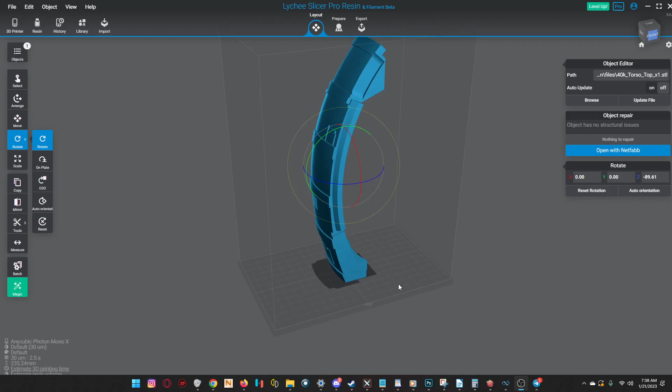Today we're going to be looking at supporting large objects, because this is something that comes up a lot and it's not quite the same as supporting miniatures. It's quite a bit more mechanical and has a bit of a different technique.

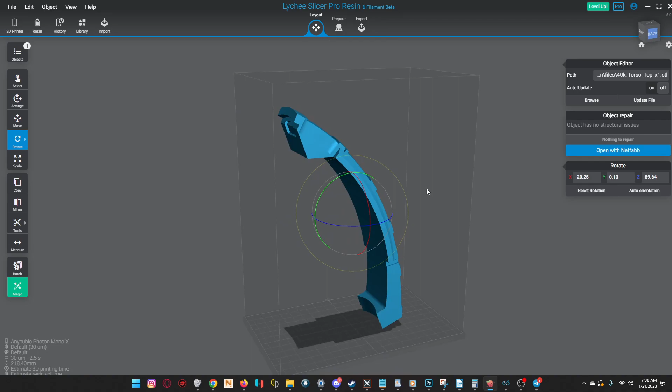The main thing you want to do is prevent your model from warping. To do that you want to actually brace it so that it's creating a perfect up-down distribution of pressure and that the supports are actually holding it in place. So here we're looking at the torso top of a Mars Warlord Titan.

So as usual, just head to supports, raise it from the plate, and then I will pause the recording while I search for islands.

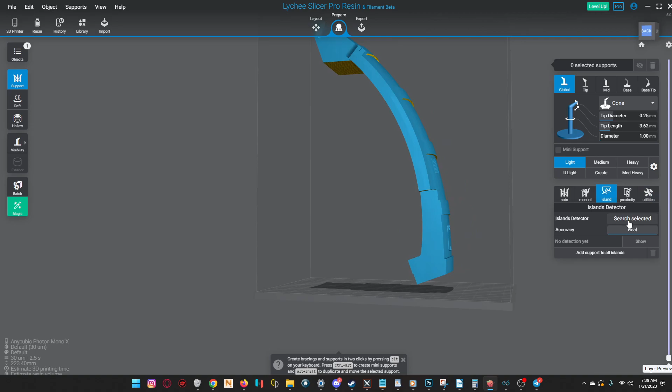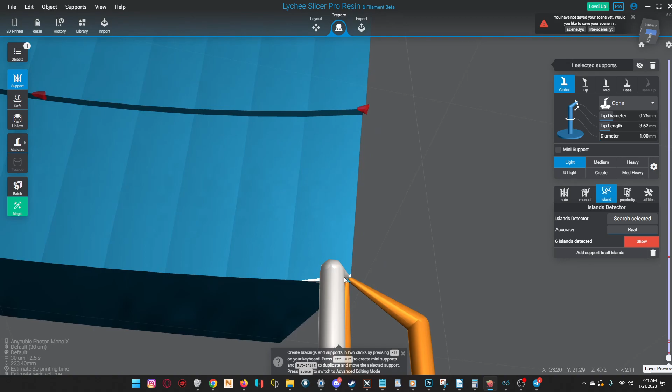Now that that's done, what you want to do is give it a very stable foundation to build from. I always start with light supports on structural because they always have these sharp corners, and what I do is pinch the corner from three sides with the light support in order to damage the corner as little as possible, but also give it a very solid foundation from which to start printing, and not overlap the edge to a huge degree and ruin some of the sharp edges of this model.

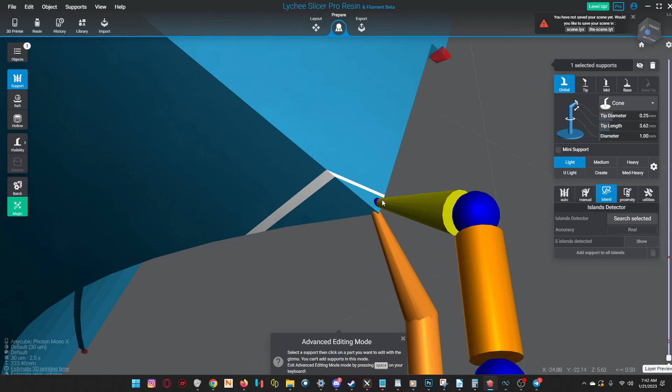So let's go ahead and actually position this correctly. Let's erase it and position it again. There we go. And a bit lower, and one from underneath. There we go. So now that it's pinched, head to heavies, and this will be where you are staying for the rest of this model pretty much.

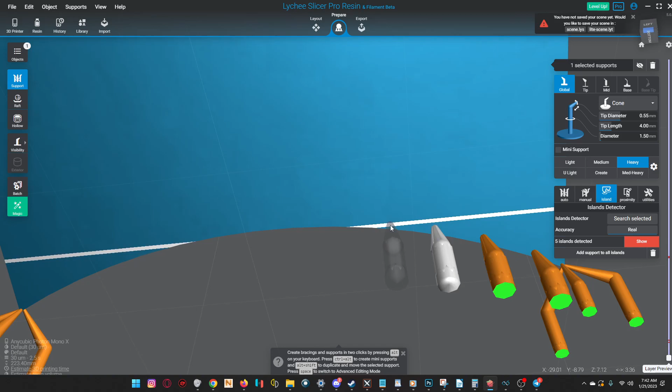What you want is about every 5 millimeters, which is about this far, to throw a single heavy support. And you really want to ring this entire thing here.

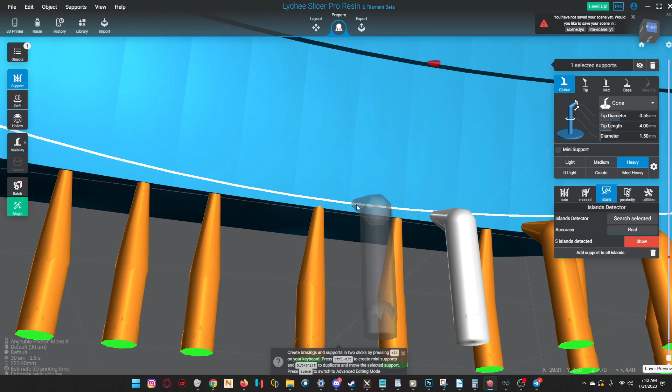Again, just to give it a very solid foundation from which to start. Then do the same thing but reverse. So I pinch the edge from one side and then I pinch the edge from the other side. Again, this is a long leading edge on a structural piece. You need a fair amount of support for it. So don't be afraid to overdo it a tiny bit here.

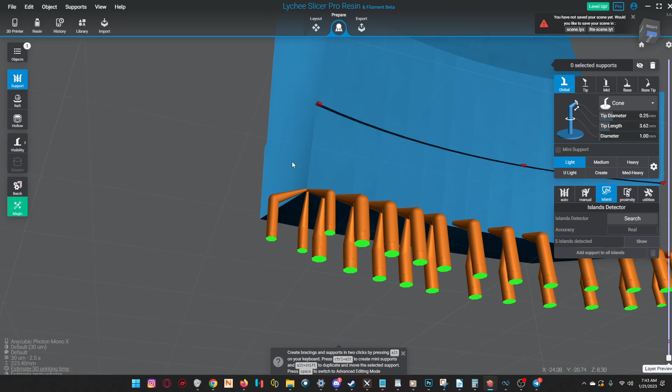The trick is to always do this on the inside, or on a face that is going to be hidden. If you can't hide the face, use light supports on that side, or only do one side and support stronger up further. So like up here, use a couple stronger supports.

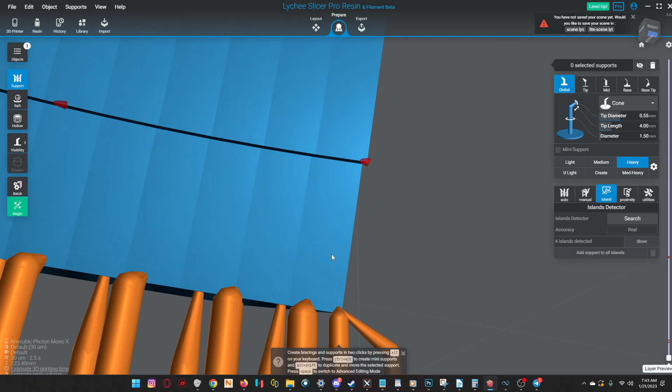Either way though, I'm going to be choosing heavy supports, putting about one every 5 millimeters still until about here, where I put a single light support just to grab that leading edge in a way that doesn't damage it. Once again, on the other side, couple heavies, followed up by a light just on that corner, not to damage it. Then back to my heavies.

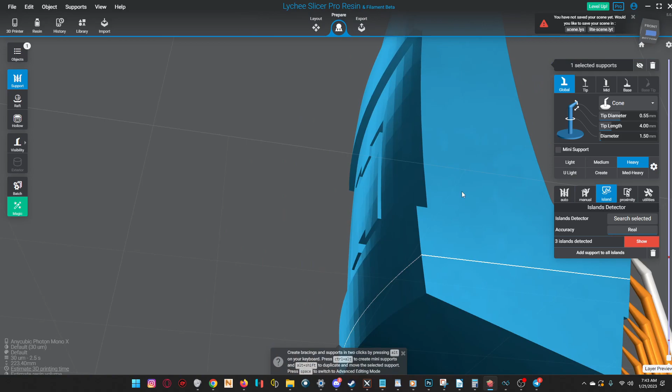You pretty much live on heavies with these structural supports, so you're going to be staying here for quite a while. Let's go, it's a big thick piece. It's so thick in fact that I think I'm going to have to support here.

So what I'm doing here is I'm holding shift, and that draws a line of supports. You can actually choose the distance of that line in manual interval down here, and then you hold shift and it will actually draw a nice big line of supports at your interval.

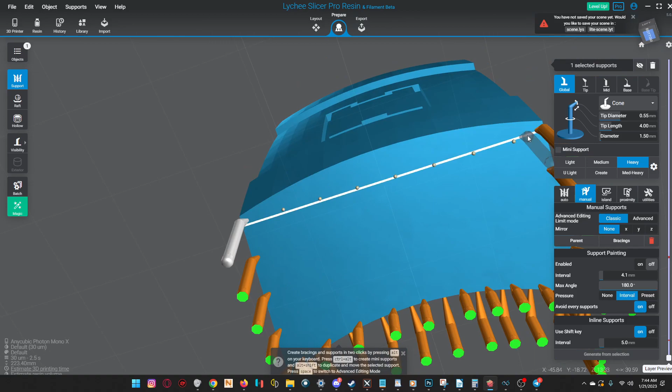I will actually do that in two directions here because I think this side is going to be entirely hidden, and if it's not, I can deal with some light sanding there.

So then I do the same inside where I can reach, go all the way up to the top using the interval, turn the corner. Make sure you grab these leading edges and grab them properly.

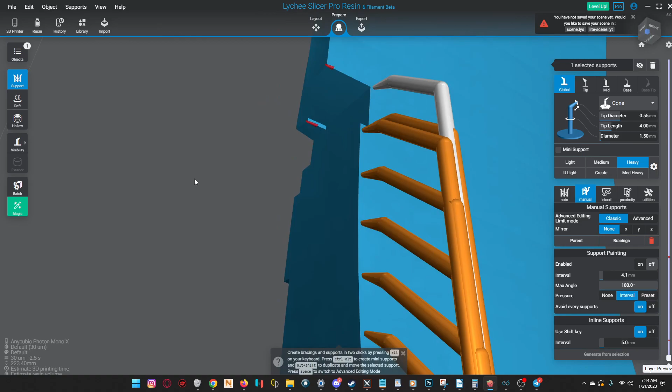I'm going to do this how I do it with every leading edge - use two mini supports. And same right here, even though that's kind of not really an island, that should just bridge quite well.

So back to heavy supports. Surround that corner, and again, just do these supports to the very top.

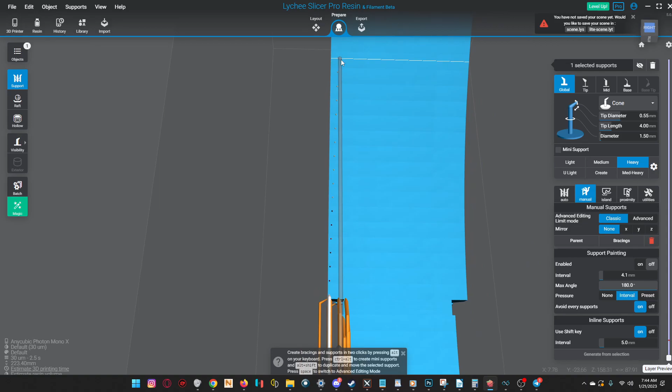So you might be wondering, why am I actually supporting all the way up to the top? Because the weight should actually be supported way down there. This is actually just to prevent warping.

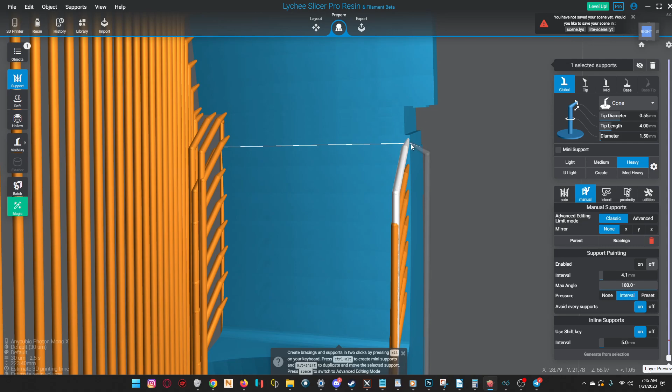If you have supports that are holding strongly from the bottom to the top, they'll actually put an equal pressure as the shrinkage pressure does on the part itself, and prevent it from actually deforming. Instead, it will maintain its shape a lot better. And large parts deforming can be a major pain, so it's a good thing to avoid.

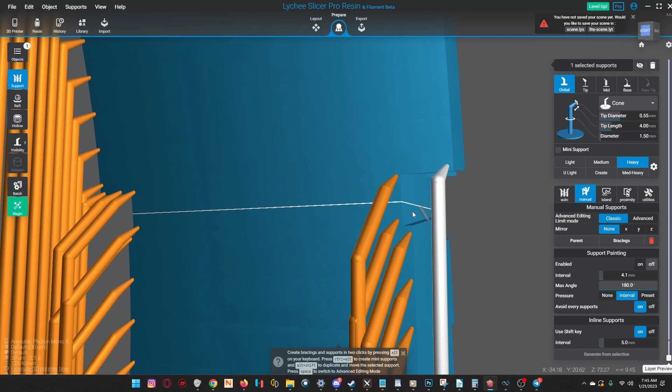Once again, just hold shift and draw a line of supports all the way up here, across the top, just for some extra stability. And then this is a bit of an overhang, so again the same thing, draw supports in such a way that it kind of covers that up.

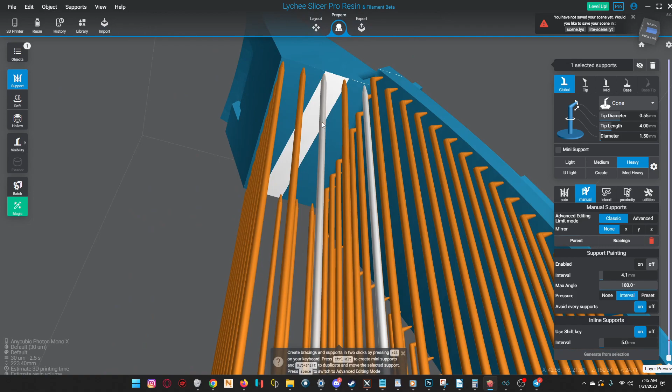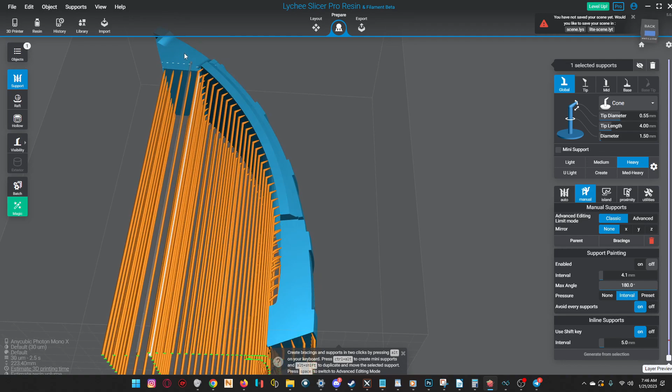It is actually building up still, so it should still be fine to just support the outside. The reason I don't support the inside at all is because the inside is all self-supported by the model itself. This counts as one big support that is holding on to its future self. All I'm doing is equalizing the pressure so that it isn't swinging in any direction.

So then on this side, same thing one more time, and we are done. Hit bracings, get that all braced up so that they actually have some structural stability, and you're good to go.